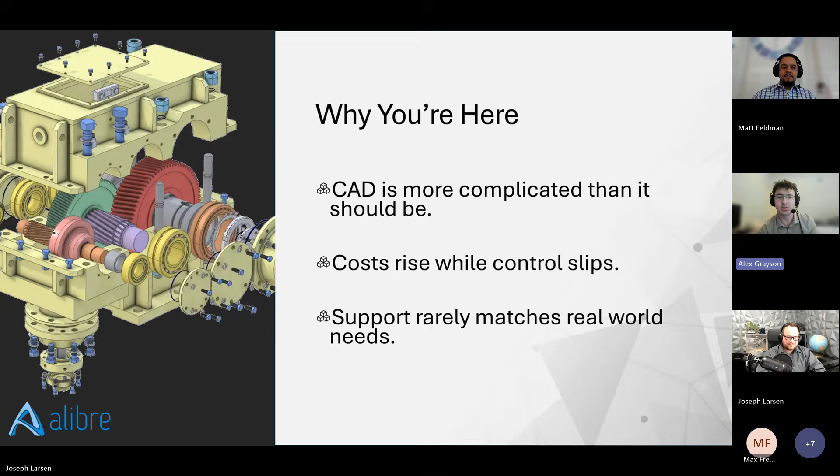So let's go ahead and go over the background of Alibre. Why are you here? Well, let's be honest. CAD feels harder than it should be. Costs keep climbing year after year, while the big CAD giants move the goalposts whenever they want. And when you need help, support often feels disconnected from the real-world challenges engineers face. What we want is speed, reliability, and control, not hurdles. That's where Alibre comes in.

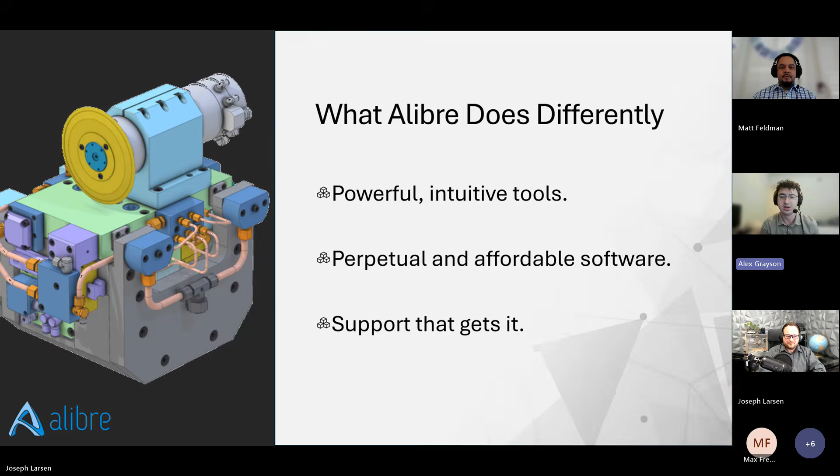With Alibre, you get professional-grade tools that are powerful, yet intuitive, without the unnecessary bloat. You buy it once, you own it. Costs stay affordable, predictable, there's no surprises. When you need help, you'll be talking directly with engineers who understand your challenges. Updates come regularly, but they don't break your workflow. The result, lower long-term cost.

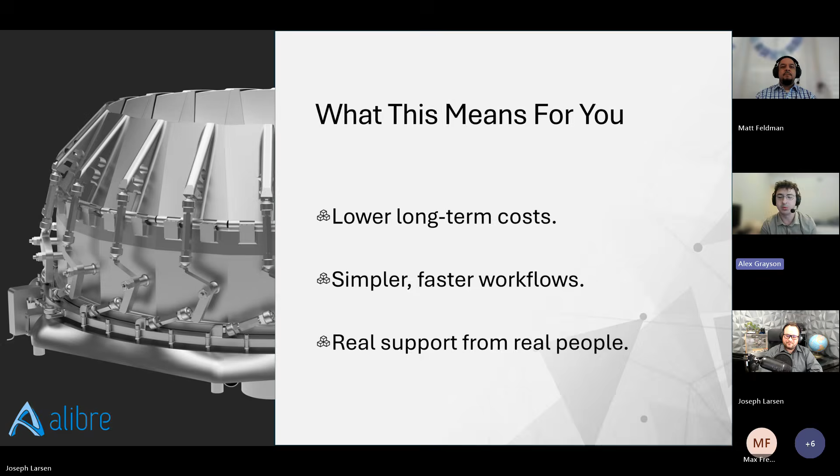In fact, our customers have already saved over $248 million in licensing fees due to our low-cost structure. That's money that stays with your business, fueling innovation and growth. Simpler workflows help you move faster, and faster adoption means new users become productive quickly. And through it all, you have real people, real support when you need it most.

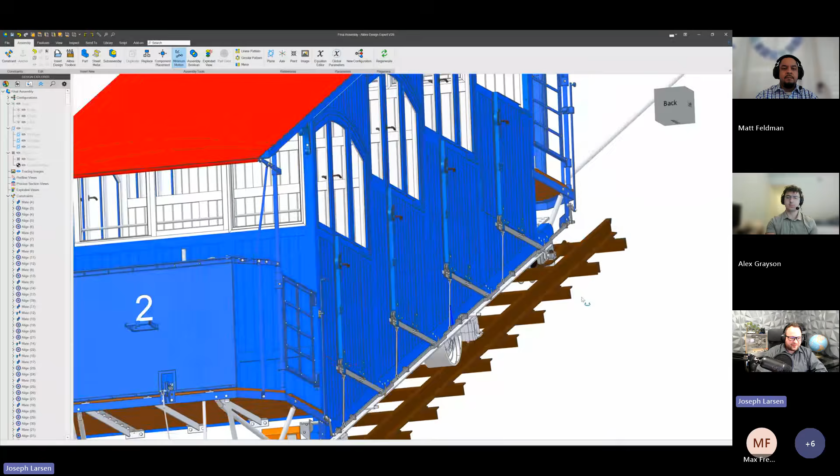Let me pull up a model here. This is one of my favorites. It is a cable car, and it really, I think, demonstrates the complexity that you can achieve when you work with Alibre. This is made up of many parts that are all put together. So you have all these separate part files that are put together to become one large assembly.

And when we look at the kind of complexity that we can achieve, I think the question is, how do we start? So in this demonstration, we'll run through what the basics look like, and then we'll circle around to hit the really advanced and complex things that Alibre can handle as well.

So I'm going to start by opening up my PDM software, and we're going to be talking PDM near the end of this presentation. But this is some software that allows our teams to be able to collaborate. If you're in a business and you have to collaborate on an assembly between a lot of people, this is the software to do it. And I have in here a door handle that I can get started with.

Now, in Alibre, we have this graphics display window where we can see our green planes. We have to the left a design explorer, and this keeps track of everything in the graphics display window. It also creates a little recipe for our part as we move along. And then up top in the ribbon, we have all the tools needed to make a great design.

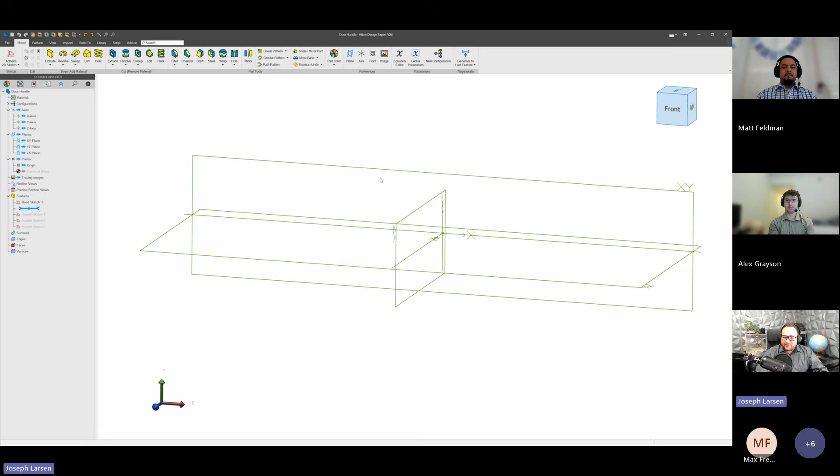Now, when we go to make parts in Alibre or in parametric CAD, we can start with a two-dimensional sketch. I'll go ahead and create a sketch on my XY plane, and I'll make a simple rectangle. Now, CAD allows you to make things very dimensionally precise, and so I can add a dimension here, a very specific one. Let's go with 15.78 or 15.75 even, and then I'll give this a dimension of 3.

So I've made a very dimensionally accurate rectangle, but it can still rotate. And sketches use things like constraints and relations to be able to constrain this kind of motion. So I'll grab a horizontal here and make sure that we are completely black, which means that Alibre knows exactly where everything belongs. I can use something known as the extrude tool that turns this 2D sketch into a 3D model. I'll give this a dimension of -0.5.

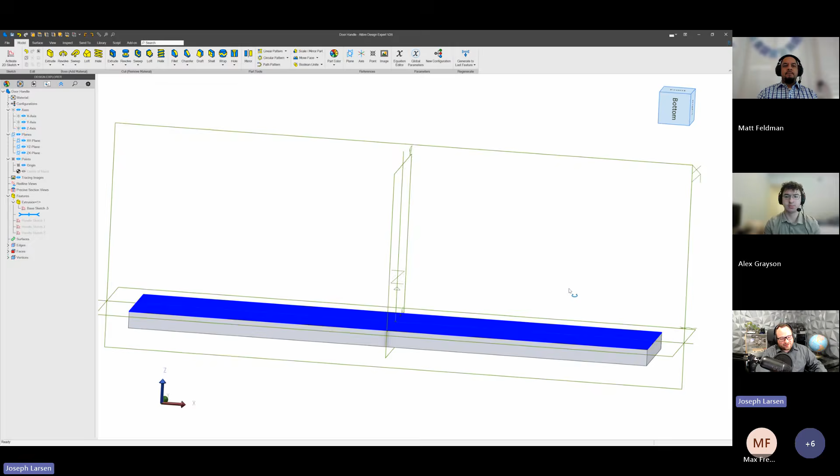And just like that, we have, I guess you'd call it a rectangular prism, and the very start of our own door handle. So I'll go ahead and show some of these other sketches that I've already made. I have a circle, a rectangle, and another circle, and I think we can make a great door handle out of this. I have a loft tool where I'll tell this circle to slowly transform into this rectangle.

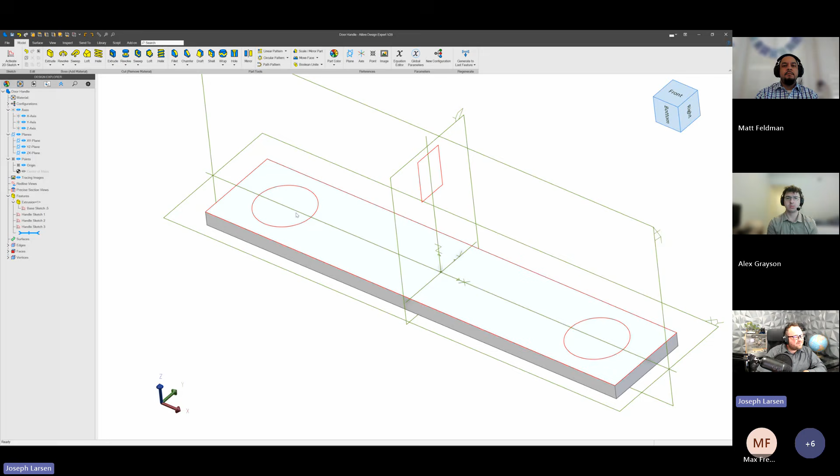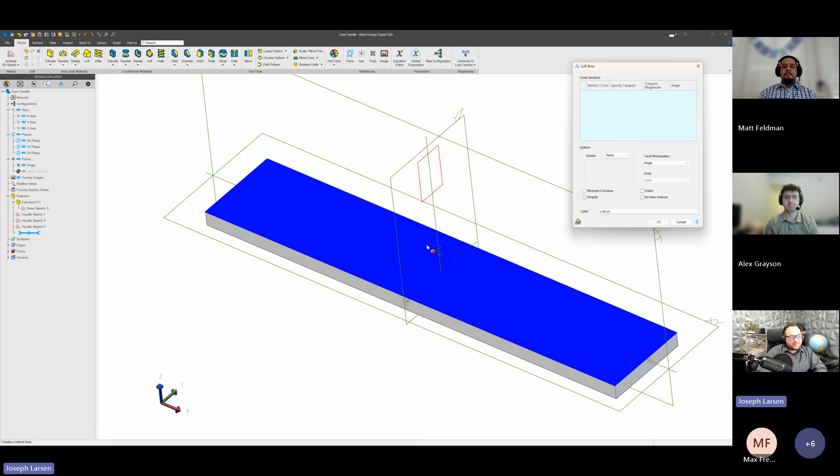And then slowly transform back into this circle. Now, I think in my settings, I've turned off a 3D preview. So let's go ahead and fix that so you can see what I'm on about. Under Design Viewing, 3D previews. There we go. I'll go ahead and grab this loft tool again, and now we should be able to see that. I turned that off just to play with something earlier.

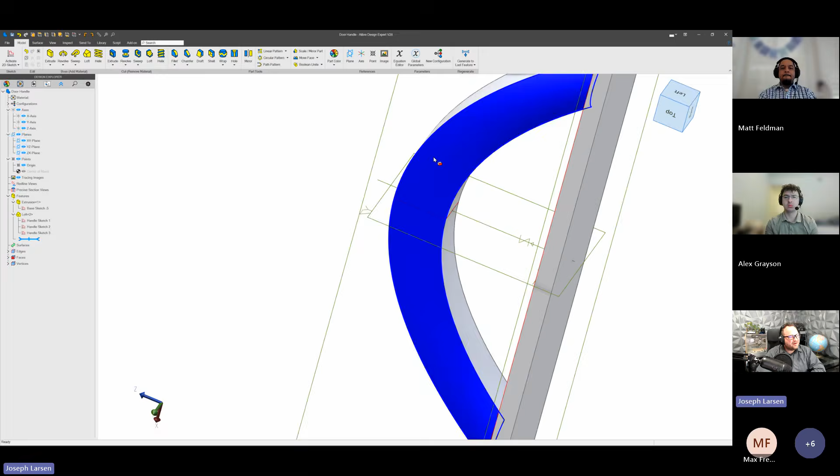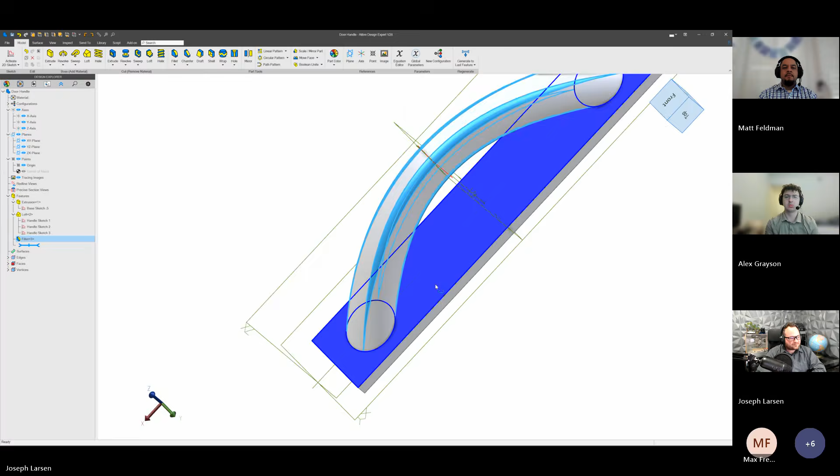We can see how that circle slowly transforms into a rectangle and then back into a circle to get exactly the door handle that we need. Now, this looks pretty good, except there's a pretty sharp edge there that might hurt if I were to pull on that really hard. And we have this fillet tool that can help round out some of these sharp corners. So I can add a fillet here. We can see how this has really smoothed everything out, and we can continue to add interesting enhancements to our model. So this is what the modeling process looks like.

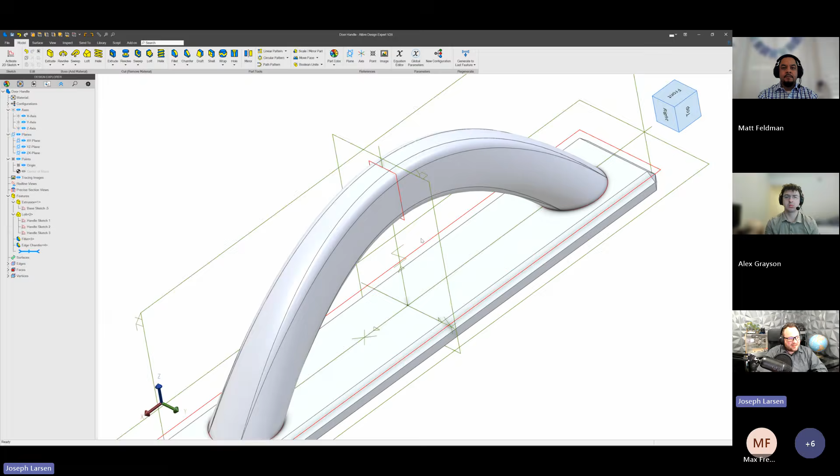We start out with a basic 2D sketch, and we can use a variety of tools to add different features and details that create a very good looking model, and we can build in our design intent for CNC, injection molding, or however you wish to make your parts. Now that we've added a bunch of features and we have something that looks like a door handle, we can come over here to our Design Explorer, and we can see all the things that we've done. We've added a chamfer, a fillet, a loft, but we also can roll back and see one step at a time all of the features that we've been able to add.

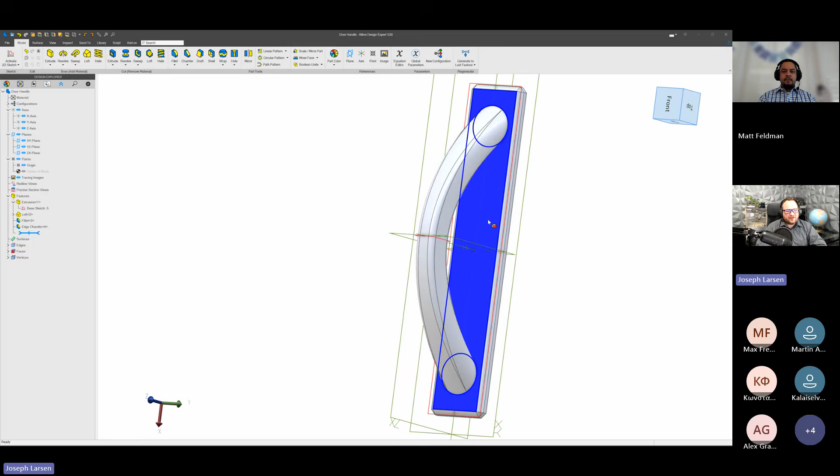Now, this is what we would call parametric because we can go back to any of these things in our history, and I can say, you know what? I have a new constraint. I need to make this 16 instead of 15.75. And all of our dimensions update, and we can see the new model instantly with the changes that we've been able to make. So we're able to not just make a part, but dimensionally accurately adjust for everything that we need to. So this is a good example of a part and how we can go back and forward in time with this recipe that we would call a design explorer or a history tree.

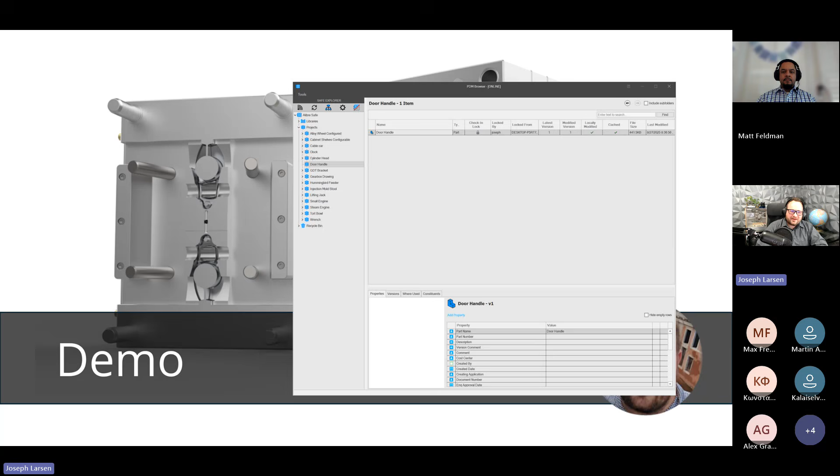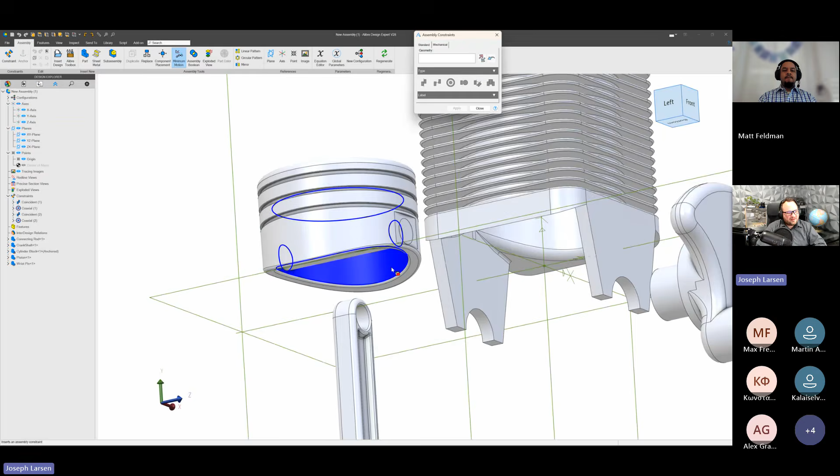However, what does it look like when we put a bunch of parts together in an assembly? I'll grab a small engine here. And once this comes up, I can say, you know, I want my engine to actually work and move like a real engine, of course. And so in assemblies, once we put parts inside, we can grab our constraints and we can say, I want this wrist pin to be right around my connecting rod. And simply by clicking, Alibre can ascertain what kind of relationship we would like to have. I'd like my crankshaft to be butted up right against this part of the cylinder block, and then I'd like my connecting rod to go right on my crankshaft.

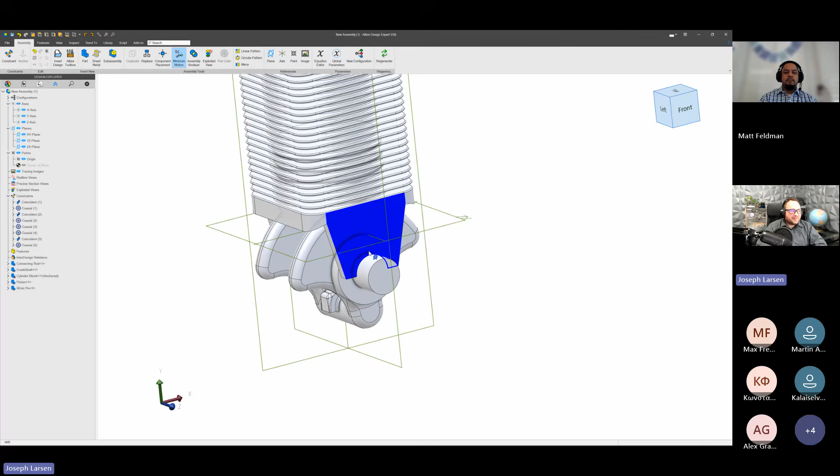Now I've put some transparency right on our cylinder block, and as I move this, you can see a very realistic motion between all of the parts. And this kind of visual confirmation makes it very easy to see that things clear properly and don't interfere. One of the easiest ways to check for errors very early on. And the sooner we can catch errors, the more that we save.

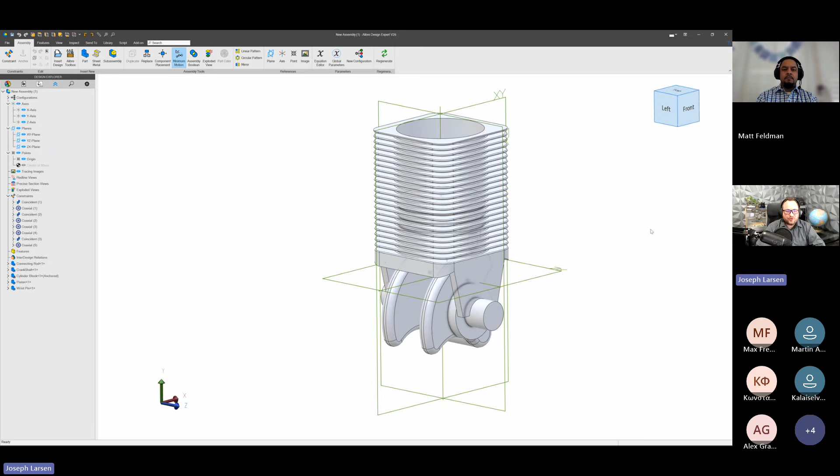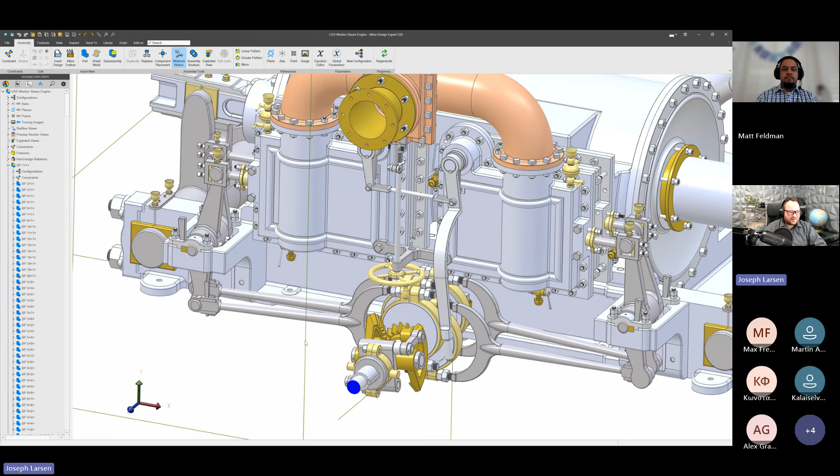So why don't I run over to a more complicated assembly now? One of my favorite models, we have this beautifully made steam engine. This is made by one of our users named Harold. And I love the realistic visualization of these kinds of motions. As I spin this, we can see that this is moving just as we would expect. Now, there are some things that we might want to check. So I can certainly spin the shaft and see that all these things are interacting.

But if I look at a joint like this, I might ask myself, well, what if my hole is too small and my pin is too big and there's an interference? But there are a lot of quick and easy tools that we can check. For instance, I can say, I want to check this pin against all of these other parts and make sure that nothing is interfering. And when I check, I can easily have the peace of mind that no interferences are found.

Now, this is a wonderful tool, and I'd like to actually pull up another example of using this. I have an injection molded stool here in my PDM. Go ahead and open that up. This is a stool that has the early stage tooling, a core and a cavity, and I want to make sure that things fit together well.

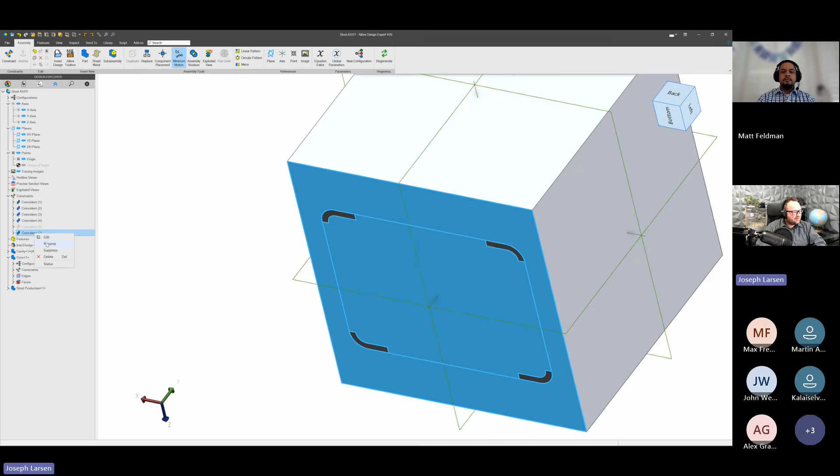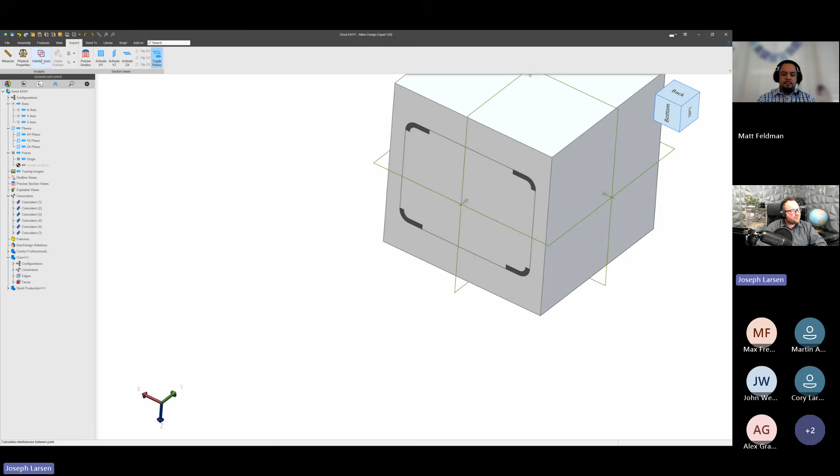I'll suppress some of my mates here and pull out my core. We can see a rather complex stool with a lot of support ribs and patterns in there, and things look like they go together well. But how do we know that everything is fitting together well without cavities and without interferences? Well, I can go with our inspect and once again run a global check against all parts. And after a quick second, we can see that there are no interferences found.

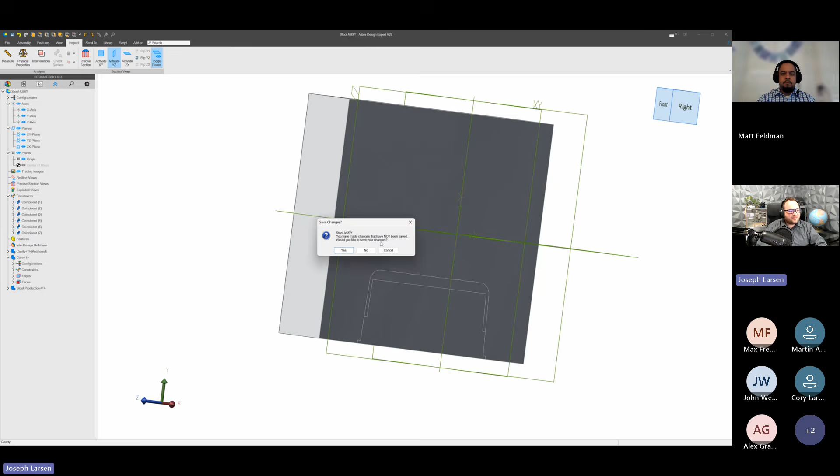I also can view section views very easily in Alibre, and I can see my stool sitting right in the middle of my tooling, and I can see that there are no cavities. So things fit together as we expect, and we can easily check some of these things. Again, this is critical to avoiding costly mistakes, and that's where these tools make all the difference.

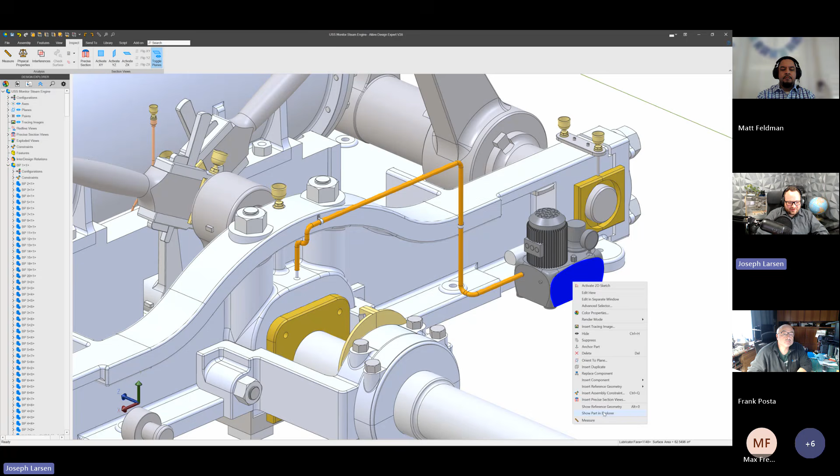Once again, I can return to my assembly here with my steam engine, and I've got a lubricator that is lubricating this shaft inside of my engine. And I have to make some minor updates. It turns out that where I put the lubricator is a little bit off. So I'll relocate this lubricator. Instead of say 2 inches away from that face, we'll make it something like 10. And as this shifts, we see a problem. Our lubricator tubing is no longer going through that clamp, and it's not meeting where it should anymore.

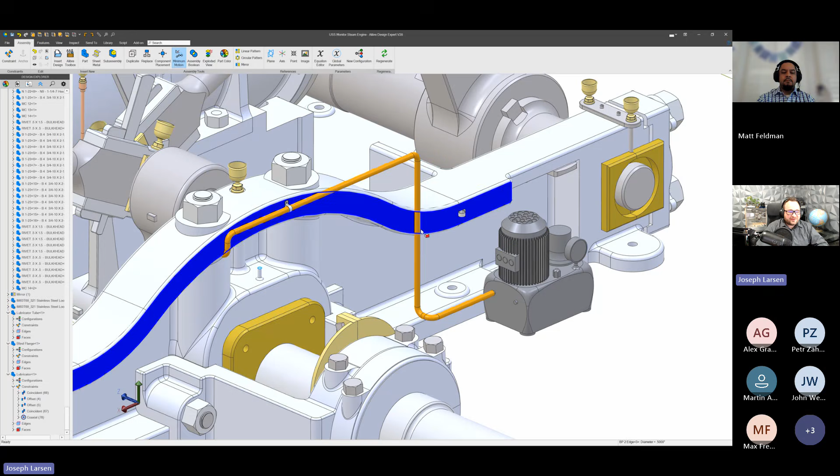Now, minor assembly changes can turn into a frustrating chain reaction of manual edits, resizing parts, replacing holes, double checking alignments one by one. It eats up valuable time and it increases the chances of errors slipping in. But we have a secret weapon. Now, with design in context, I've actually been able to define this tubing in the context of the assembly. So all I have to do is make sure that everything is regenerated and it automatically snaps to the right place. We'll do that one more time because if you blink, you might miss it.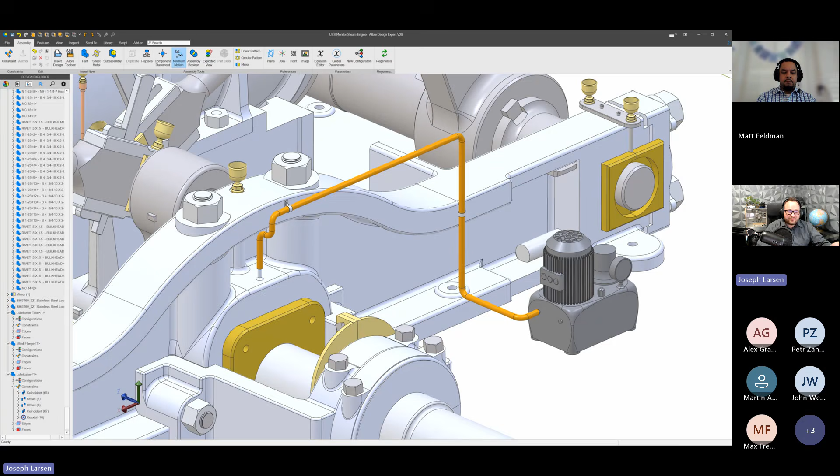We'll move our lubricator and see that it is just not lining up, but by clicking regenerate, the tubing snaps to the right place. So when we need to make these parts, we can avoid the frustrating cascade of adjustments and we can go ahead and work on what matters the most, improving our design instead of fixing it.

Now, here's a sleeve bearing, but I wanted to update this, and I added a little hole right here for a ball bearing to go in. So let's insert a design from our PDM. Here I have my ball bearing. And as I go to put this in, I can see that it is immediately the wrong size.

Now, anyone working in CAD knows that we have to resize and adjust things all the time, but manually editing dimensions, recalculating clearances, or adding or removing elements like the number of rolling elements in here can be a real pain. It's slow, prone to mistakes, and we have another secret weapon that saves us from all of this. I'll go ahead and edit this bearing right here in the assembly, and I have an equation editor. So I'll go ahead and open that up. And this has been designed with equations in mind.

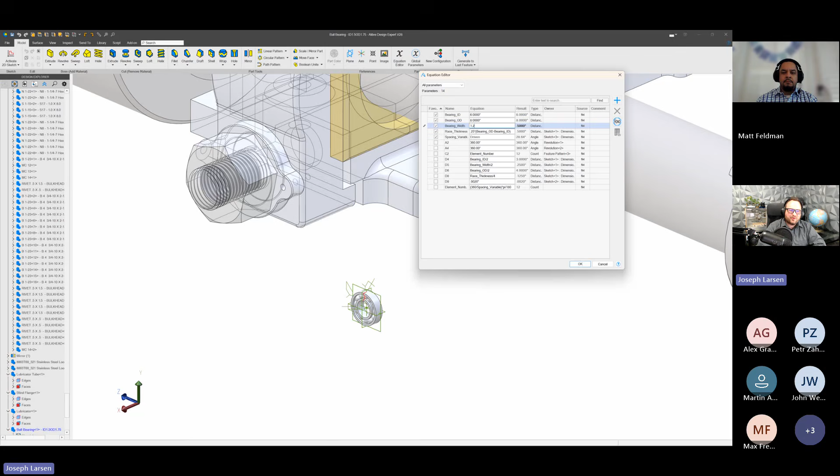So I can say, I want the ID of this bearing to be 6 to fit around that shaft, 8 to fit within that other element, and then I'll make it a little bit wider at 1.25. Now, when I go to update this, we can see that it is instantly updated and with the correct number of rolling elements, taking all that out of our hands. And we can simply go forward with equation-driven intelligence.

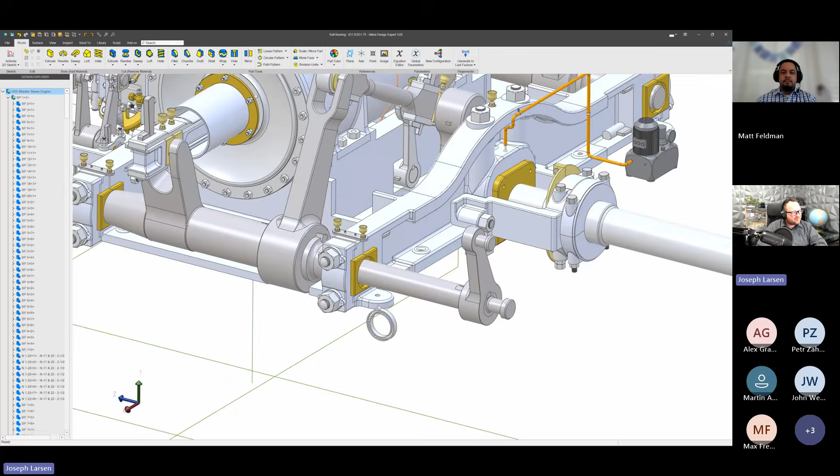Now I'm going to edit my main assembly. And we can simply put this exactly where we'd like to have it. So I'll add a constraint and make sure that this face is aligned with this one. And then I'll place it right here in the housing where it goes. Now we have some other spots in our assembly where we need a bearing. In fact, I think I didn't put that in at quite the right orientation, so we'll go ahead and go to our constraints.

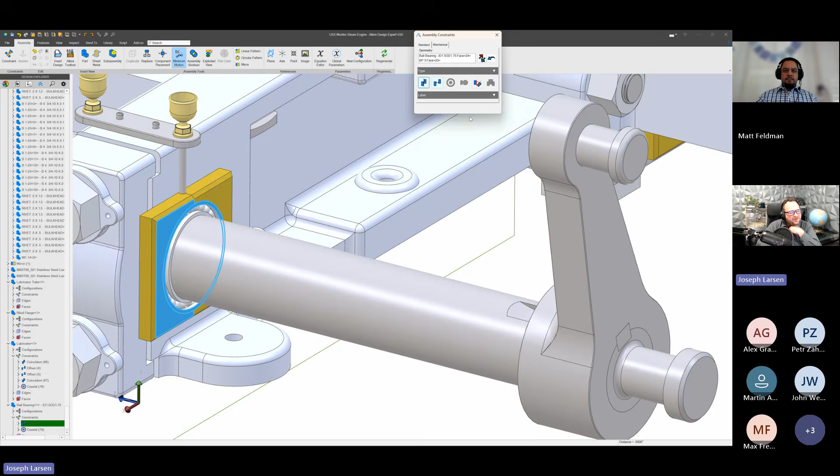And it's as easy as flipping this around. Now, once I put this bearing in on the other side, we'll be good to go, but that can be kind of cumbersome to insert parts one by one. And that's why Alibre has linear and circular patterns available.

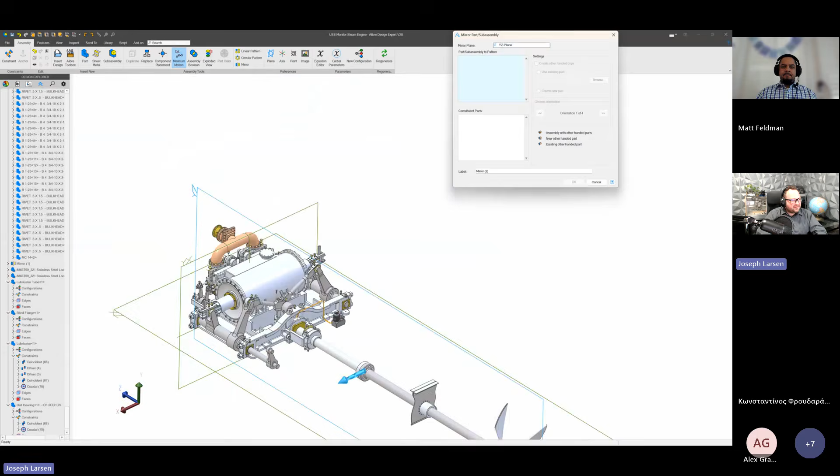So what I can do is run a mirror here. And I can say that this plane runs right through the middle of my assembly, and I'll mirror that bearing. And just like that, we have a mirrored bearing.

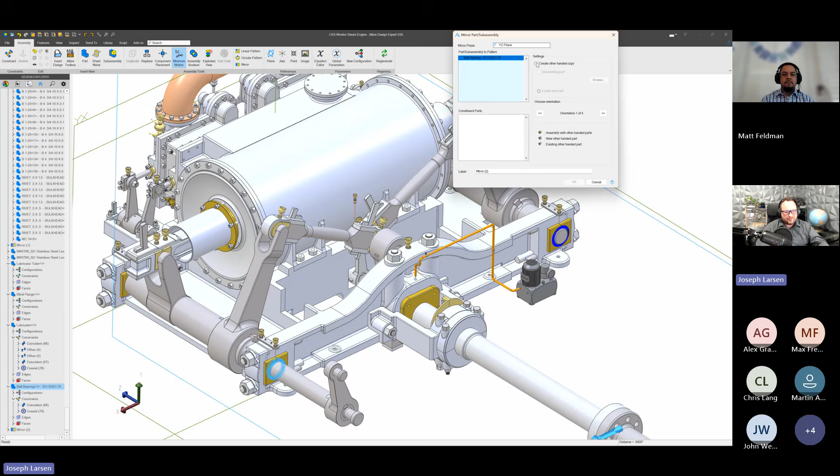What's very great about Alibre is, let's say I have a left shoe and my assembly requires a right shoe. Well, I have the option to create an other-handed copy if I need to mirror an entire part on the fly, which saves me from having to trace individual parts and create new files for mirroring. We can handle all of that complexity right in the assembly.

Now, if I shift our focus to this upper flange. This is a blind flange covering our engine, right? Maybe we need to ship or maintain the engine with something that keeps it clean. And we have a bunch of holes that need to stay aligned. And that can be a real pain in the sense that maintaining consistency across multiple files can mean chasing down dimensions in multiple parts, updating them one by one, hoping nothing gets missed.

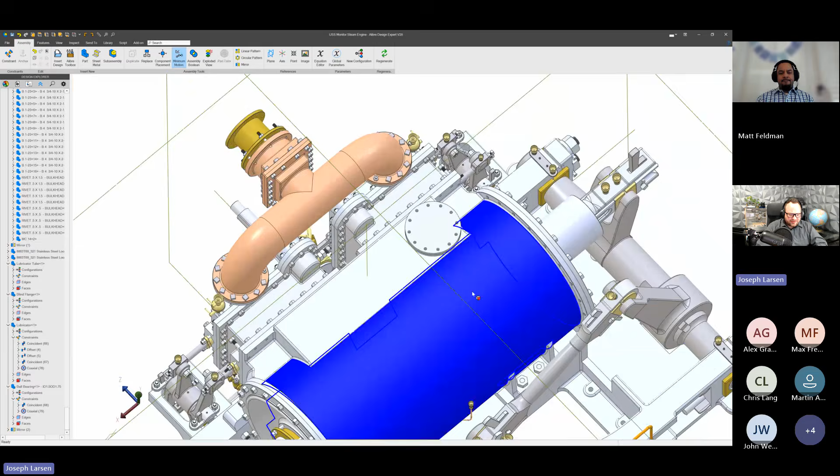Instead of doing something that's tedious, error-prone, and a big time sink, we have yet another secret weapon up our sleeve. Now, if you're thinking the design in context that we did with that tubing would work, I think it sure would, but we have something even better known as global variables. So I'll choose my steam engine, and I have a global parameters file right here. Now, this has a lot of the dimensions built right into our file. This looks a lot like those equations that we were doing with that bearing, but this applies to many parts.

So let's say I want to update my blind flange and engine with a new bolt circle diameter. Maybe we'll give that 12.5. We'll give the holes a larger diameter of 1. We'll reduce the number of holes down to 8. Maybe we'll make a bigger diameter at 15.25. And we'll make everything thicker at 1.25.

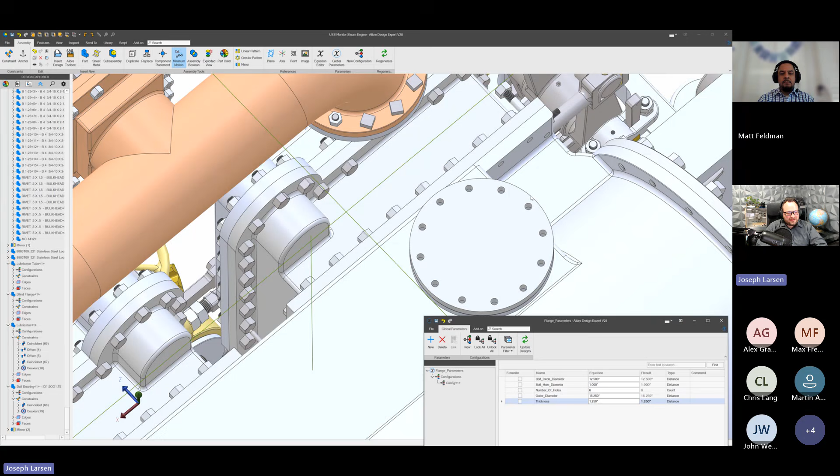Now, making all of those changes by chasing down each part and changing those in the history tree will take a long time. But here, I just need to type them in as I've done and click on Update Designs. Now we'll watch as this updates instantly right there. And we can see that our holes are all lined up and we've been able to drive the entire assembly.

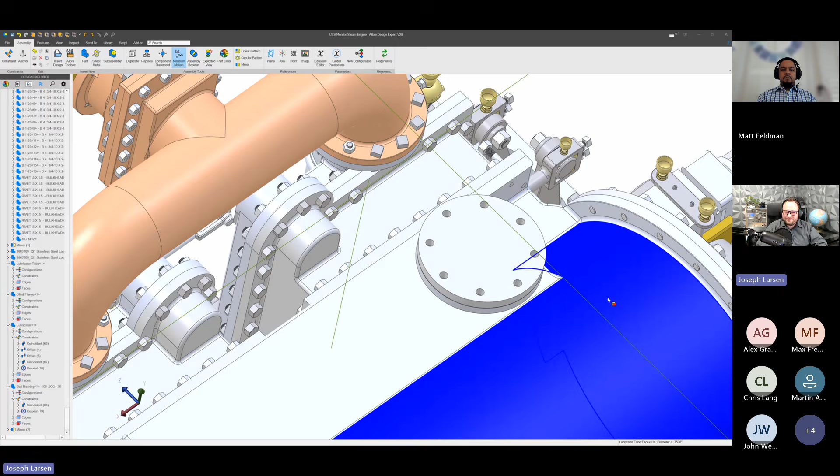Now that's a simple example, but imagine if you have an entire shelving assembly, you can update the entire assembly with just these parameters. So if you're making custom shelves or anything like that, your updates become instant instead of chasing down files. Now, I'd like to point out that I don't actually have any bolts on this coupling.

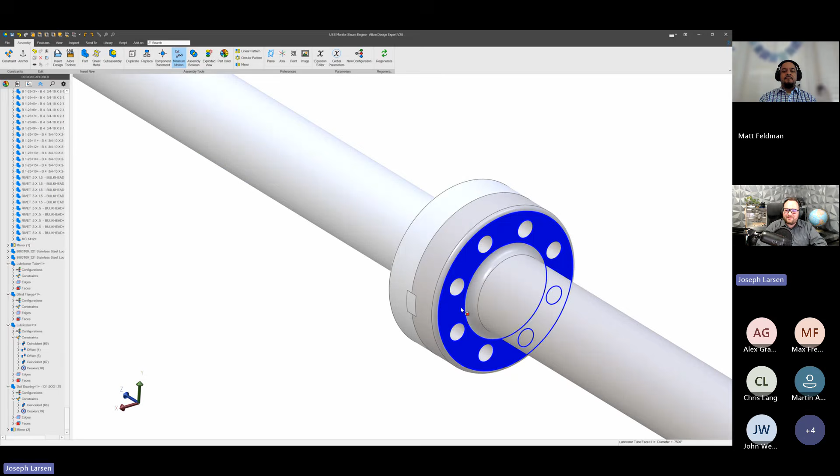One of my favorite sites for parts like that is McMaster-Carr, but the novelty of going there every time I need a bolt or a nut or a washer, downloading it, importing it, wears off pretty quickly. And again, our goal is to maximize your time where you want to spend it the most. And that's why we have Alibre Toolbox right here. This allows us to have complete control and even make configurable libraries of our own custom parts.

Right now we have a samples folder, but in future versions of Alibre, this will be filled with fasteners, tubing, angle iron, all kinds of off-the-shelf parts when you need it. So stay tuned because this is going to get very full pretty quick. Here, I've made my own custom bolt, and you can make your own custom parts configurable in this as well. If you're in the phone case business, you can insert a configurable phone case right on the fly.

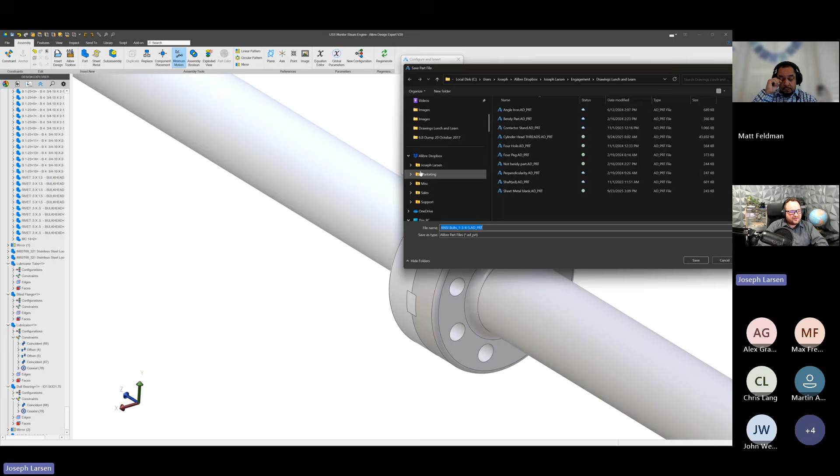Here's what my bolt looks like. Now I know that this hole needs to be for a bolt just under 2 inches, and I've created a little designation where I can choose, again, a bolt that's just under 2 inches. Now the preview will update and we have a larger bolt, but of course I need it to have a longer shaft length. We'll give that 10, and we'll give this a thread length of 3. Now once that bolt comes into the assembly, I can go ahead and save this as a part. In fact, I'll just throw it right here on the desktop.

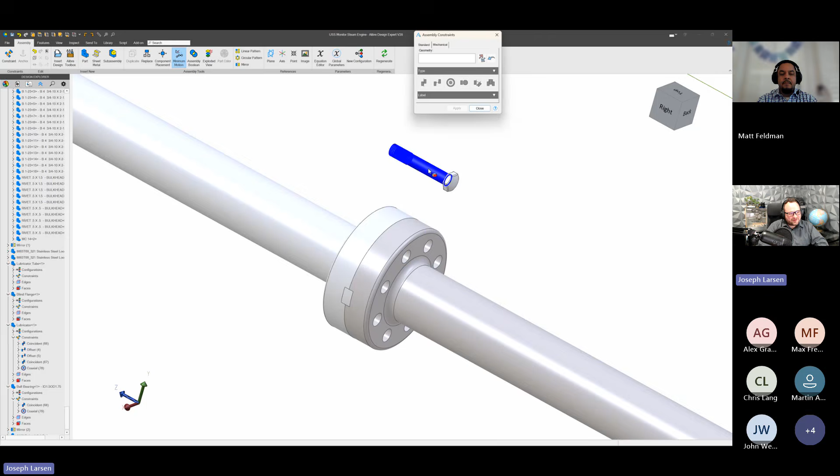And once again, I'll be able to place this just like I would any other part in the assembly. So we can have entire libraries right at our fingertips, and we don't need to go to external sites or import parts, and we can do this with all of our custom parts, so it will be sure to meet your needs. Now again, I can create these bolts or duplicate them one by one and insert them, but with our patterns, we have the ability to do so much more quickly and easily.

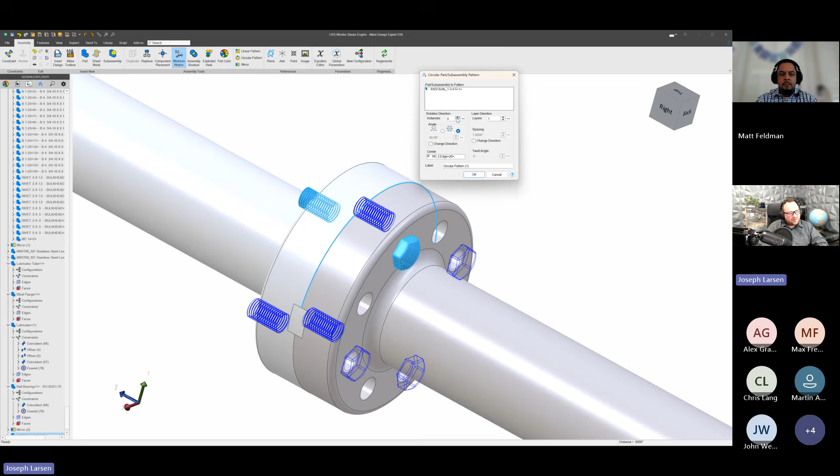I'll create some more bolts right on the fly, and I can see that in my number of instances, I've got the right number of bolts right there. Now, I love having pretty pictures, and so I am one to throw highly detailed threaded bolts right in our model. But of course, these take up some processing power, and I think most people would rather have a stand-in for a bolt that isn't so detailed so that their computers can run fast.

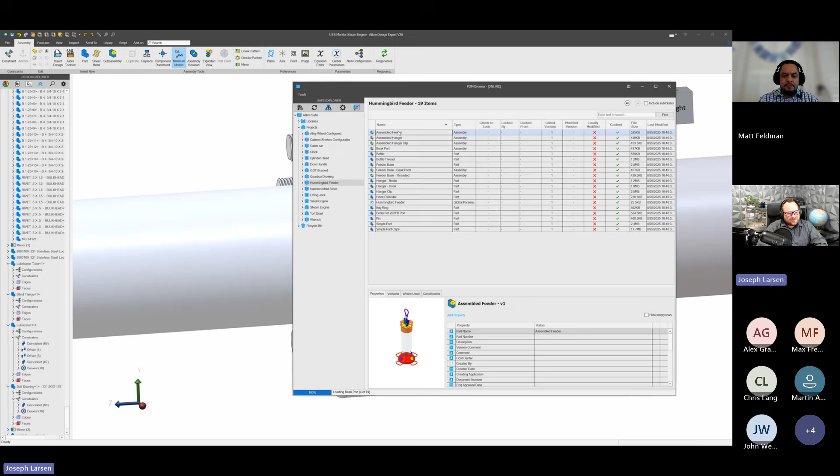When we need to have versions of parts or families of parts, there's a great thing known as configurations that allow us to have the power to do that. I think one great example is this hummingbird feeder. This hummingbird feeder has a lot of configurations around it. This is an assembly, so configurations are not just for parts, but assemblies as well. Here is a hummingbird feeder where I can activate a new look, and all of a sudden I'm feeling quite patriotic. It allows our assemblies to have different parts or appearances.

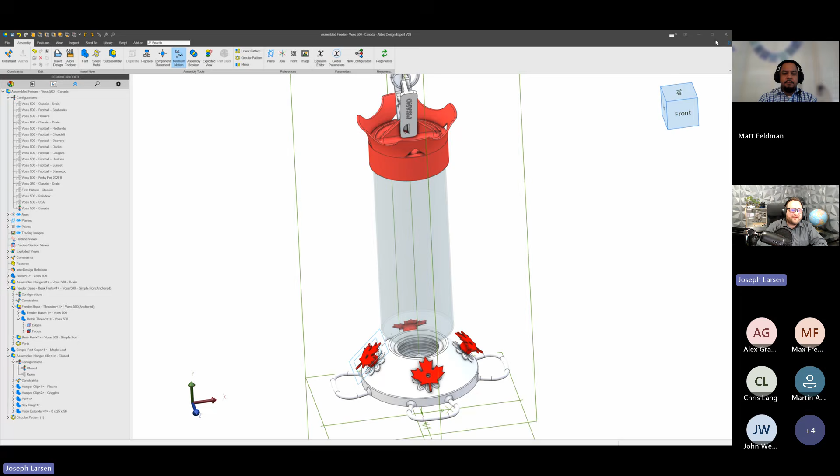And so instead of having to trace down all of your different versions of a part, we can have it all in a single file. This allows us to save time and reduce errors. Without these, we'd be stuck manually copying, editing, and tracking many files. But for faster, cleaner workflow, configurations are a big help.

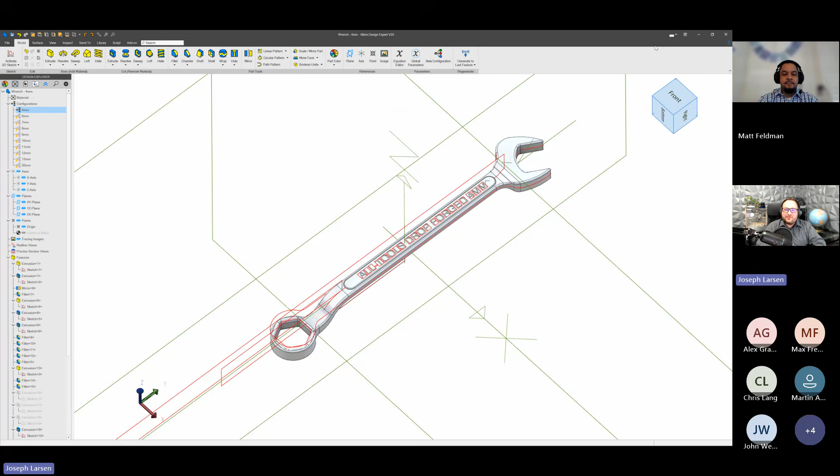I'll pull up one other example because sometimes it's important to have a family of parts. Here's a 6mm wrench. And of course, I may need to turn a bolt that's 10 millimeters. In fact, I recommend having two because anybody who's worked on anything knows you always lose your 10 millimeter. But just like that, we can activate our different configurations and see the entire family of wrenches and all their sizes all in one. So configurations will speed up your workflow and simplify all of your files.

Finally, you may have some salesmen or people who are working with your products and customers that are not used to CAD or have never used it before. Let's talk about one handy thing for them. I'll open up a new part in Alibre, and we have a library tab right here. And in our library, I'll click on Generate. So we can have a catalog of parts that can be generated with a unique and easy interface.

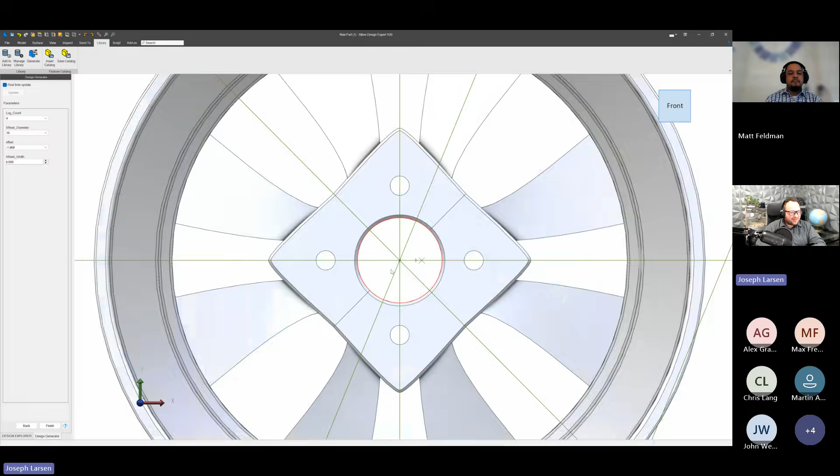Maybe you're in the alloy wheel business. I've got a Supra in the garage that I sure would like to have some more wheel options that fit it. And so naturally, I made an alloy wheel that would be capable of fitting my car. Here's a 4-spoke, 4-lug wheel. And let's say your salesman is sitting down with your customer and they want, of course, a 5-lug, which is much more common. Well, your sales guy just needs to change the lug count to 5 from this drop-down menu.

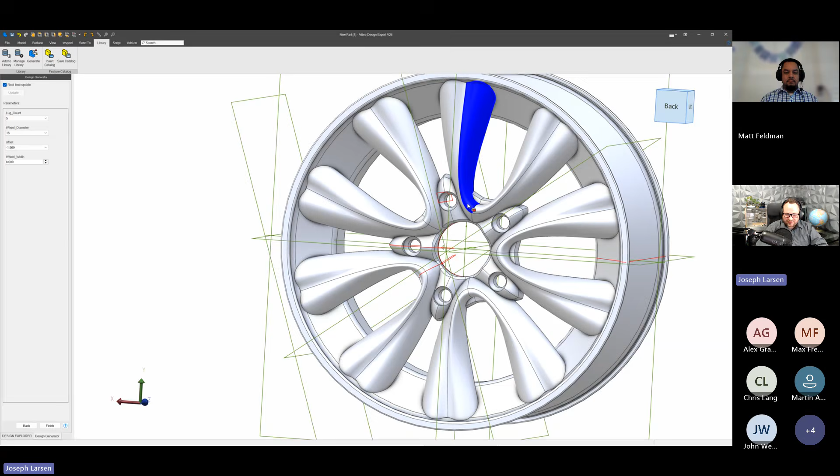Again, this is a completely custom part. And we'll see some intelligent updates. The spokes will become slightly narrower to account for the extra spoke. Our bolt circle pattern will change slightly as this very complex part loads. And we even have some diameter updates all happening in the background with the intelligence that we build in.

Now, perhaps your customer wants a larger 18-inch wheel. Well, that is totally achievable, again, just by using the options in the drop-down menu. So we can have entire features that show up or go away based on the values that we put in this thing, and we can see some amazing updates.

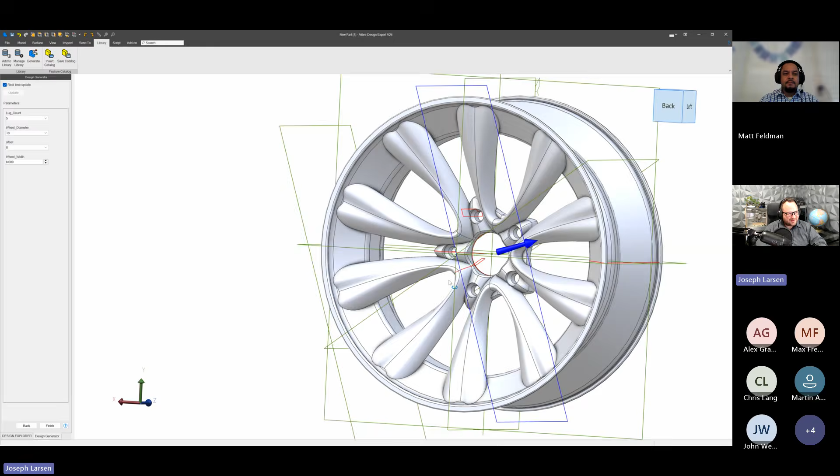Now, my Supra is a 0 offset, which is a little less common, and so naturally, I'll put a 0 in there and feel the joy of knowing that at least this model would fit my car pretty well. Just like that, we see the offset update in real time with all of these complex features working together.

So again, we can simplify everyone's workflow a lot, even for those who do not use 3D CAD. Now, I might want to point out that the things holding the studs in my house together right now are sheet metal. In fact, it's in our phones. It's just about everywhere—we're rarely an arm's length away from sheet metal.

So when it comes to sheet metal, you may need to design something in sheet metal as well. That's where I have this lifting jack. I'll pull up the assembly here, and we can see it's made out of sheet metal. As I twist it, it goes down or up just as we'd expect a real jack to do, with our assembly relationships. I'll open up this base in a separate window, or I can edit it.

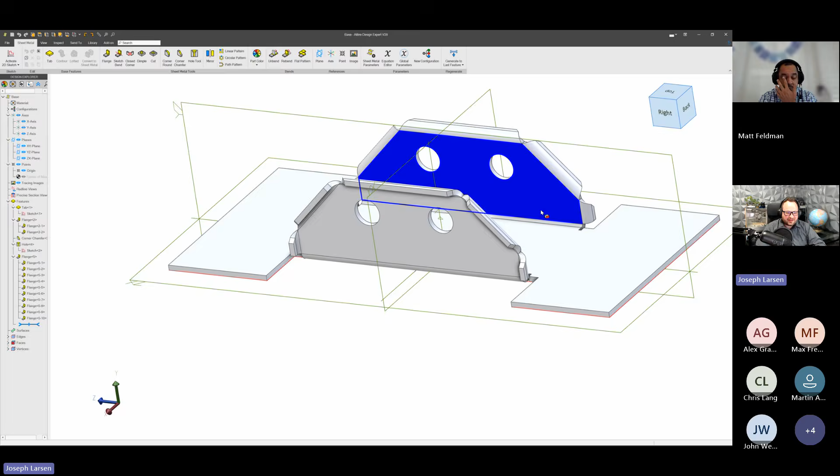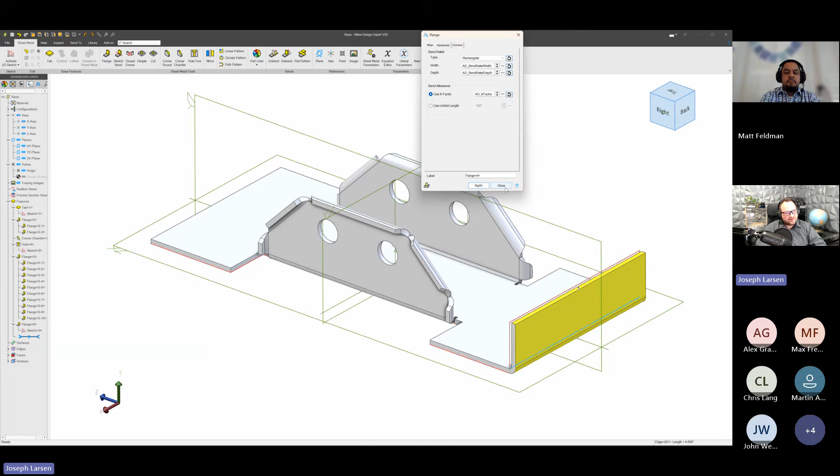Now, the trick with sheet metal is it will stretch or compress when you bend it, so you need to calculate what those dimensional changes will be at every bend to know how to make the flat pattern. But the magic of Alibre is it does all of that on the fly, so you can make your final part in its finished dimensions, and Alibre figures out what the flat pattern should be. When we add a flange, we can specify a K-factor under bend allowance, or even use unfold length options to figure all of that out. So being able to have a correct sheet metal part very easily is very important.

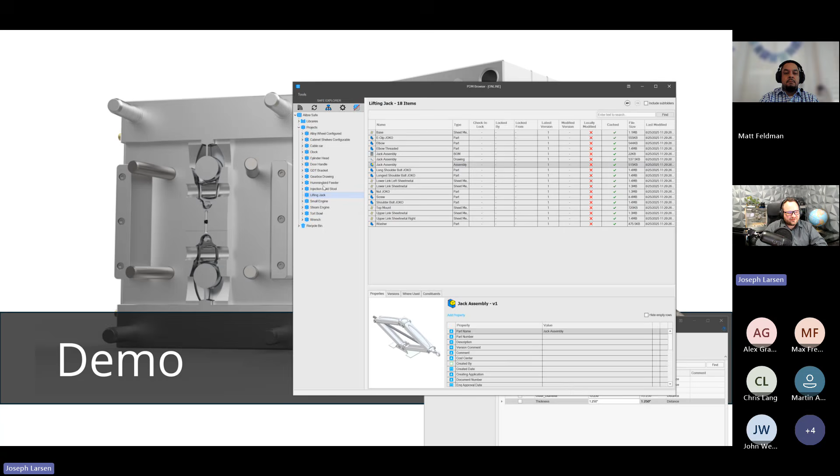But I think all of us are going to work with suppliers at some point. Here I have a project for a gearbox drawing. It may be hard to find among all these files, but our search feature makes it pretty easy to pull up. As I load this gearbox drawing, we want to have unambiguous drawings that we present to suppliers, and that includes all the options for drawings.

We have broken out section views, detail views, aligned section views, and so on. As this drawing comes up, we can see there's a number of views already here, and a number of callouts that tell us what these parts are to make it clear.

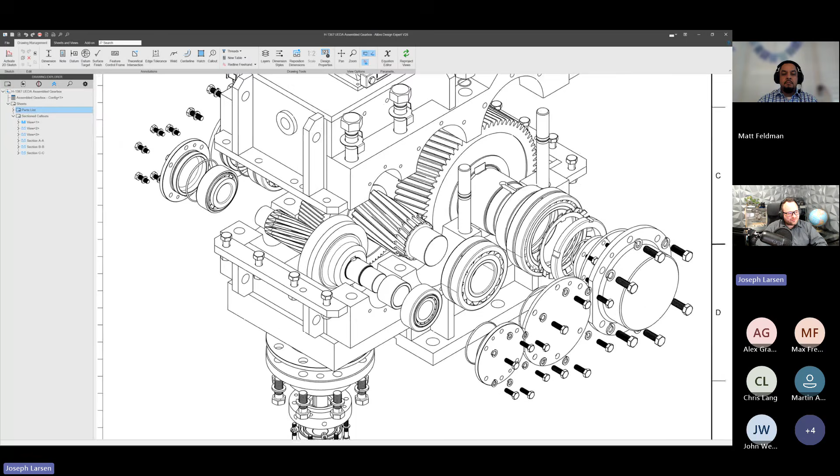Now, if I change sheets here and go to our parts list, we can see a pretty complex exploded view when this changes, as well as an updating bill of materials. A picture is worth 1,000 words, and these exploded views of our assemblies really tell us how things should be assembled. Now, these bills of materials are updating, so if I change something in my assembly, our quantities, part numbers, and descriptions all automatically update with properties.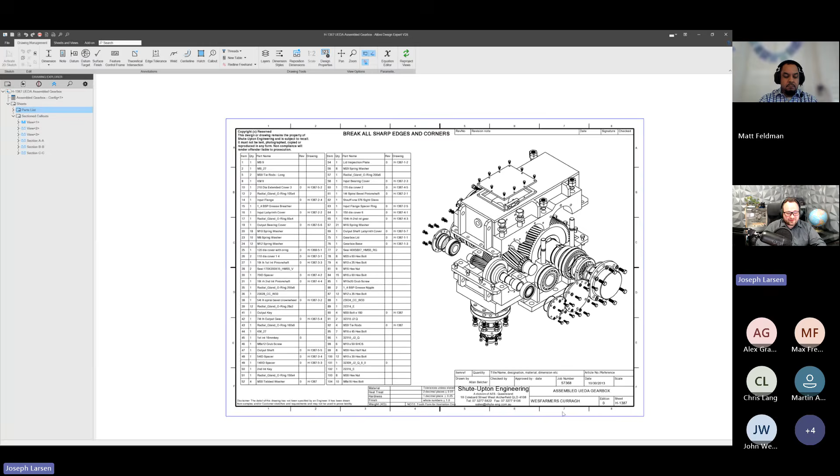The same with the values in our title block, so we don't have to worry about chasing down values or updating things manually. This is a completely custom title block that the customer has made, so we don't have to worry that we're forced to present information in a certain way. Instead, we can make our own standard title blocks to our own specifications with updating properties.

Now, we have assemblies covered, but what about being able to dimension parts? I'll open up a bracket—I've got a drawing of this complete GD&T bracket. It has a number of feature control frames. We can even do compound frames or composite frames. We have, between two points, a profile of a surface, unequal tolerance dispositions. We should be able to have every dimension you need to get your tolerances exactly how you want them.

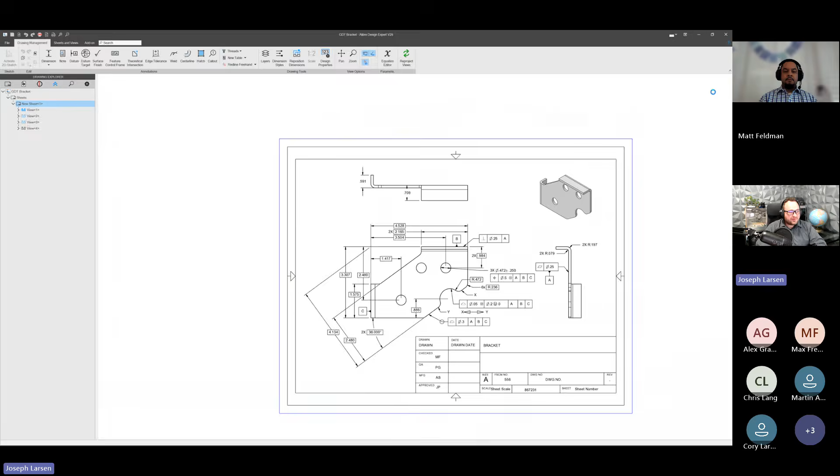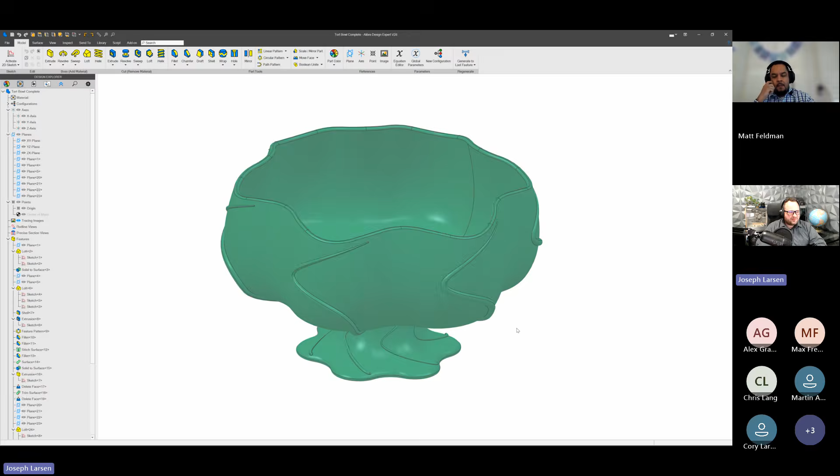Again, that's very important because we want to get the right and best information to our suppliers. So being able to portray our product in a drawing is not much of an issue. But what about being able to portray things with, say, our stakeholders, our boards, or even customers? We want a really nice picture for our customers. Here's a tort bowl, and it looks pretty nice—we have features that go all down the surface. But how might we want to present this to people who really need a pretty picture, like in marketing?

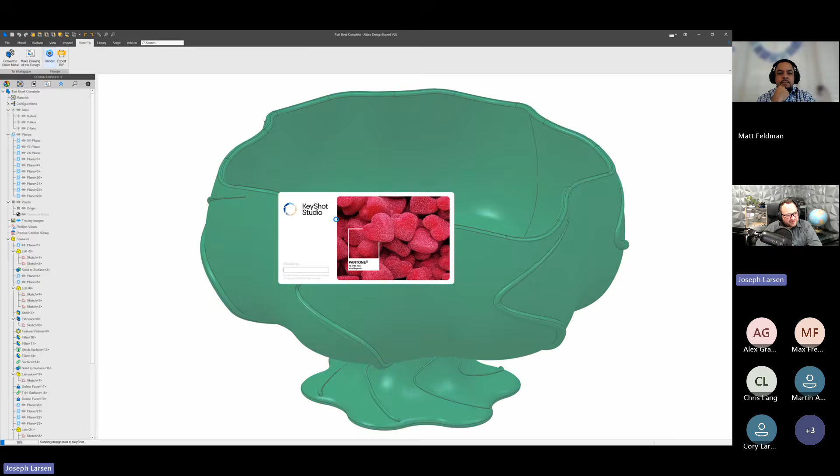For that, we have something known as KeyShot. This comes with certain versions of Alibre, and when I pull up KeyShot, we can see it opens up this render program and automatically imports our design data—nothing else needed. KeyShot has the ability to portray our part in a number of different materials. I'll jump over here to glass, right? And I love being able to see the way the light plays off of this almost instantly.

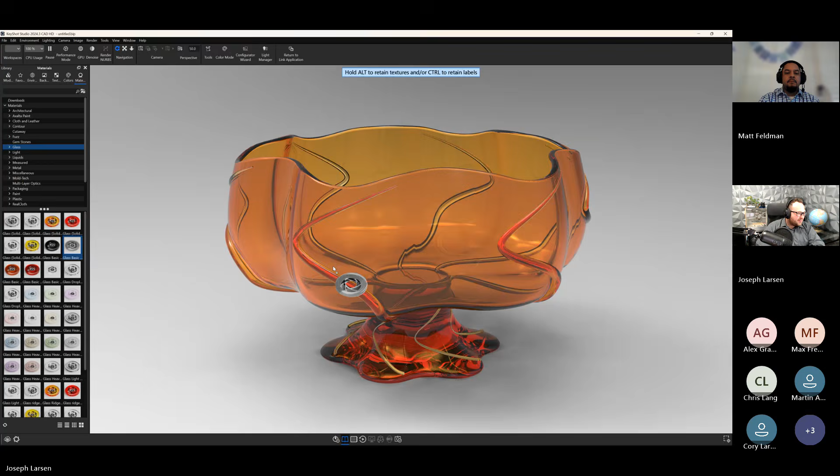I can check different options, but I think my all-time favorite is this wavy glass that really captures the way light might travel through something like this tort bowl. Just in the space of me saying a few sentences, I am now actively rendering a tort bowl in a photorealistic fashion that should look great for any customers, board members, or other stakeholders with an interest in our products.

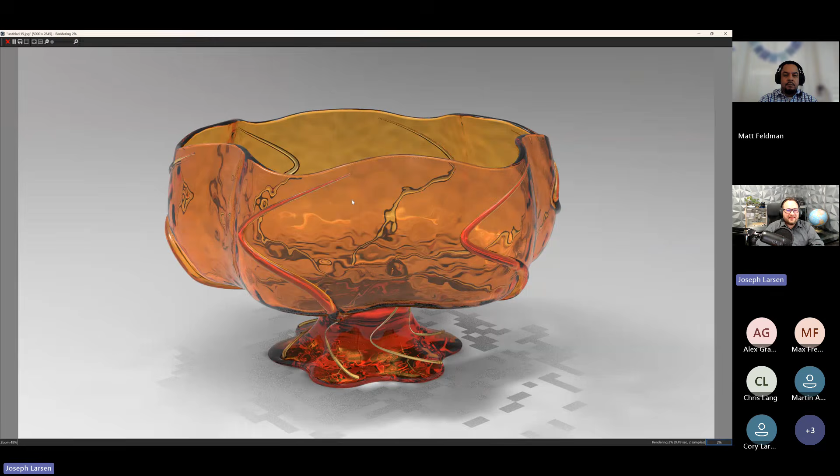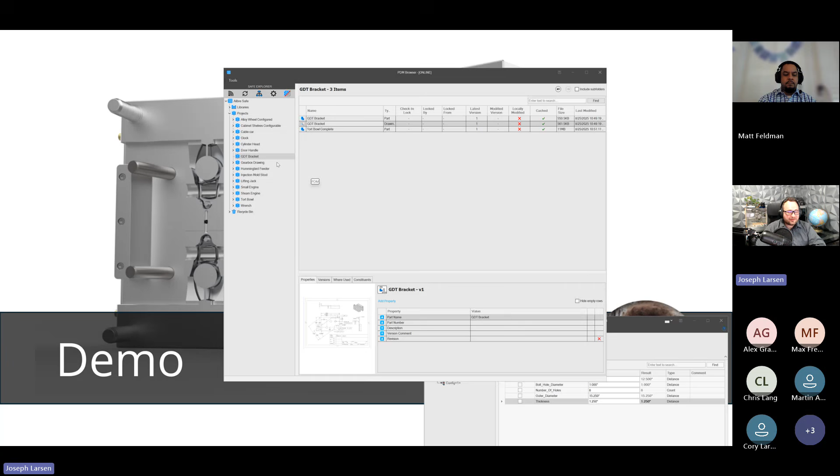As we talked about before, we've seen a really complex cable car in the beginning, and when we're dealing with very complicated assemblies, we might care about how our data is used, and that's why we have this PDM browser. The PDM allows us to have projects and libraries full of parts. It can back up and restore parts on a regular schedule and keeps versions and version histories of our parts.

So when I go to open up my steam engine, I can see past versions. I can see what state they're in. I can say, oh, I added the lubricator tube in this version.

And I also am able to see all of its constituent parts in a list. Here's my assembly with all of my subassemblies and all of the parts that make up those subassemblies. And I can even pull up exactly where they are at a given time. This helps me greatly with traceability.

I also have a lot of metadata and version control when I work with my assemblies. Here, under properties, I can see different versions and things to fill out, like when it was created, who the suppliers are, and so on. So these PDM browsers really help us to stay in the loop.

Finally, I'll throw in one more thing. I believe professional and expert versions also have this scripting menu where I can create custom scripts or use some that come with Alibre. For instance, involute spur gears are so hard to make models of, and yet with scripting, I can simply start to create a script. I'll make a very odd gear.

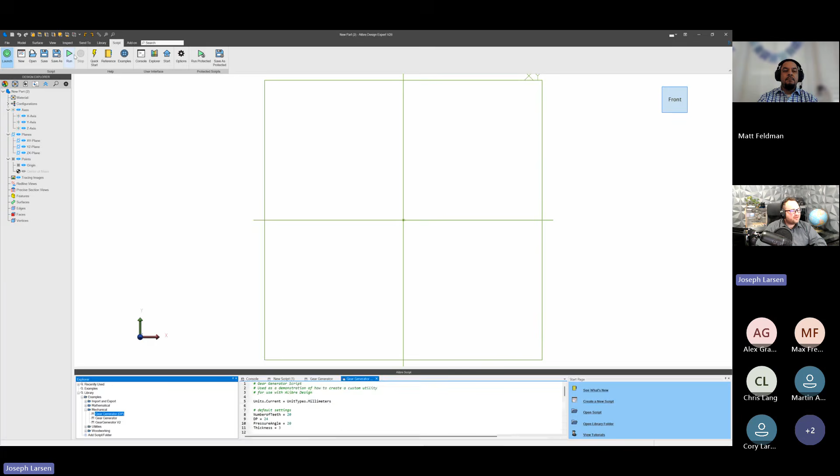Let's give it 27 teeth with a diametral pitch of 23.7, and I'll make it 10 millimeters thick. And when I click OK, I instantly have the gear that I need. So scripting is another way that we can take complex things and make them easy.

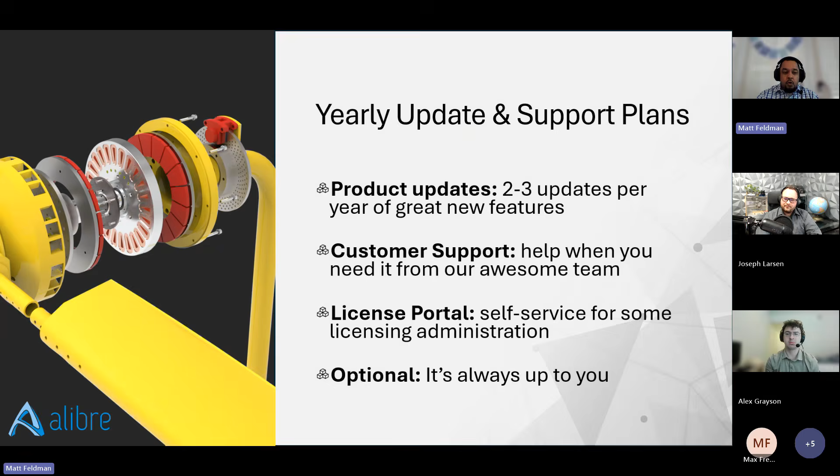Alibre offers 3 license types: Atom 3D, Alibre Design Professional, and Alibre Design Expert. In that order, they're each designed for different types of users, and you could think of them as like good, better, best. They all share the same clean parametric core, but each step gives you more power, efficiency, and flexibility.

So to start with, Alibre Atom 3D - that's going to be for makers and 3D printing. It's an excellent entry point license, whether you're designing gadgets, 3D printing parts, or doing home-based CNC projects. You get all the essential modeling tools, physical threads, and more. You can export to industry standard formats, and you have basic 2D drawing views. This best fit is going to be for hobbyists, beginners, makers, inventors, and a focus has been placed on making the interface as simple as possible while still providing ample power.

Professional is going to be the baseline tool set needed for professional product design. It includes everything in Atom 3D and offers tools needed to indicate the design intent to a third party as well. So you're going to have tools to save time, provide efficient workflows. You can create bill of materials, section views, exploded views. It also has the Python-based scripting, and expanded import-export functionality. It's going to be a rock-solid daily driver for small shops, serious hobbyists, or anyone who needs assemblies and documentation, but does not need the advanced specialty tools.

I did see a comment that I really like. It said, from Martin, great capability overview. Need some more videos on things like applying constraints and other detailed concepts.

And I'm so grateful for that comment, because it is really hard to put together a webinar and also cover the small things. I'm going to stick a comment in the chat of our playlist, and I'll share my screen here so we can see it. This is a playlist that is intended to be a completely comprehensive view for anything that a starter would need.

We have, I think, over 70 videos in this. And I think number 7 is actually sketch constraints, relations, and definitions. And so if you go through this, it should be a completely full view of everything in Alibre. We have a number of standalone videos as well, if that is helpful. And we have a forum and a help desk. So if you're trying to get started, these could be some great places to start. And hopefully that's helpful in having some more content on constraints and detailed concepts.

Oh, and I've got to thank you, Martin, for asking that question. I think I see another one here. Does Alibre offer standalone application development for a company that has designed its parts with Alibre, an app that allows customers to configure them or something of that sort? That's a great question. I know for certain that we have some developers that have created some add-ons for Alibre for application development. Max is on the line. He might have some more details for us on that one. Yeah, I'm just reading the question real quick. Sure thing.